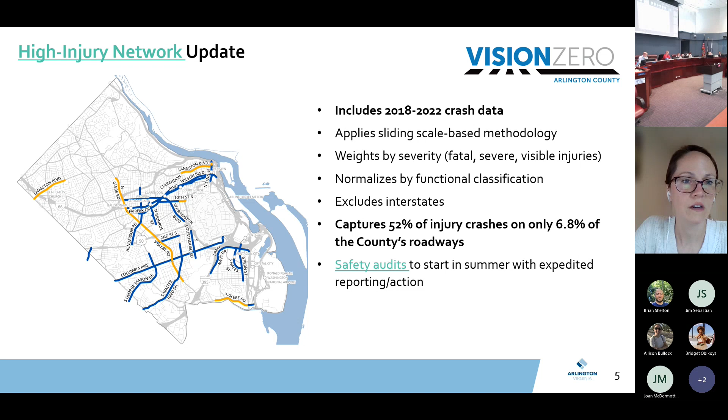And so with that, as I think we've talked about this before, our program is maturing a lot. And so we're kind of understanding a little bit more about what our program looks like and being able to communicate that. And I found this slide to be really helpful, that we have a lot of responsive work that we are doing to crashes, like critical crash follow-up.

Every time there's a fatal or severe crash, we follow up as an interdepartmental team to see what we can do from an engineering or education standpoint to address those.

We have our hotspot and high injury network programs, and we address safety concerns through the community report a problem tool. But then we have this proactive side, and this is where we're really starting to ramp up, and that's systemic improvements - finding one safety issue in one location and then trying to identify and improve other similar locations.

We do community education, which is proactive, and then there's the equity component. And that's performing an analysis of transportation safety issues countywide to identify and address areas or people who are disproportionately affected by crashes. And that's what I'm here to talk to you all about tonight, is this equity analysis that we have worked on over the past a little more than a year as an interdepartmental team.

So one of the 6 goals of the Vision Zero program is to prioritize transportation safety investment equitably in our communities.

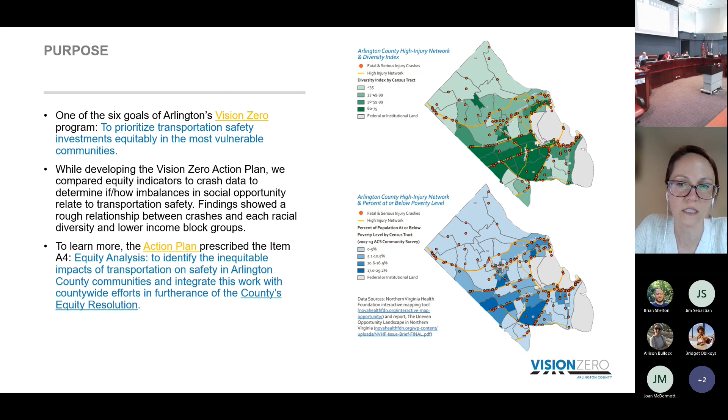That was item A4, to identify the inequitable impacts of transportation on safety in Arlington County communities and integrate that work with the countywide efforts to further our county's equity resolution and the Realizing Arlington's Commitment to Race strategic framework. So that was what really launched this effort.

So we convened an interdisciplinary internal project steering team, which helped us to really refine that scope of work, because it first started out as a mapping exercise. And then as we started to learn more, we wanted to get more people involved, so we brought in this really great team with people from a bunch of different departments. We realized this was our first investigation into transportation safety with that equity lens.

As we got deeper into it, we kind of refined the scope, and then, after doing a lot of analysis, brought a consultant team on board. We worked with Toole Design and Fehr and Peers to help quality check a lot of our work, as well as help us package it up and bring it to the community in a really nice public-facing document, which hopefully you've had a chance to look at. I think it really does a great job of communicating what we've done.

As a starting point, we defined equity emphasis areas, to focus on potentially underserved neighborhoods. Defining equity emphasis areas let us explore the disproportionate impacts of crashes on neighborhoods with lower incomes or higher Black, Indigenous, and people of color populations, because we know people within these demographics have experienced inequitable outcomes in other social realms before.

So to maintain consistency with other county equity initiatives, the equity emphasis areas we worked with were identified as part of Arlington Transit's Title VI requirements and guidelines for Federal Transit Administration funding recipients. So we used those Title VI block groups, and they're based on two separate criteria.

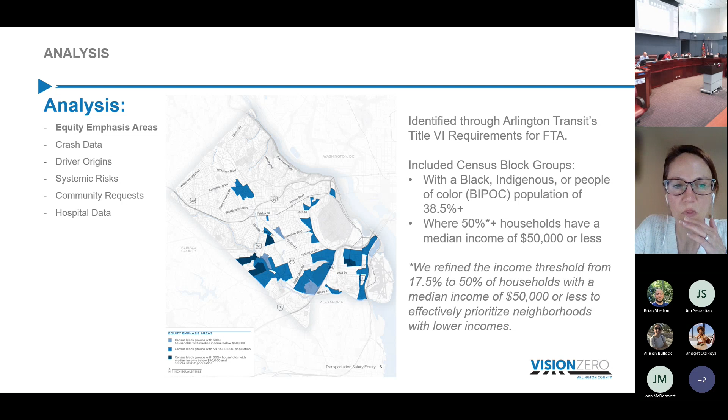So then looking at the equity emphasis areas, we looked at crashes from 2017 to 2021, and we did find that equity emphasis areas experienced almost twice as many crashes per square mile than the county as a whole. So that helped to really confirm that there was an inequity there.

We also assessed the origin of drivers, so we looked at the zip codes from the drivers on the crash reports. I know a zip code isn't always a great level of geography to conduct an analysis like this, but that information was readily available in the police crash report dataset, which allowed us to do this analysis. So that's why we worked with the zip code.

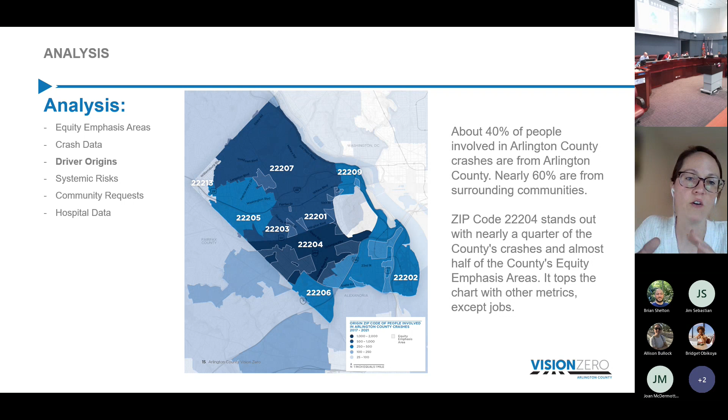But the intent was to identify origin patterns and determine how local and regional trips impact crashes. Knowing where people involved in crashes are coming from really helps us to better direct resources to prevent crashes. What really stood out to us in this analysis was that people from 22204 were disproportionately involved in crashes, and we did see a lot of overlap with the equity emphasis areas and the 22204 zip code.

We also analyzed the intersection of crash factors with socioeconomic, roadway, and other built environment variables to identify crash trends and at-risk locations, both countywide and specifically in equity emphasis areas. This was called our systemic analysis, where we try to see what issues are common and identify those risk factors and address them before crashes happen.

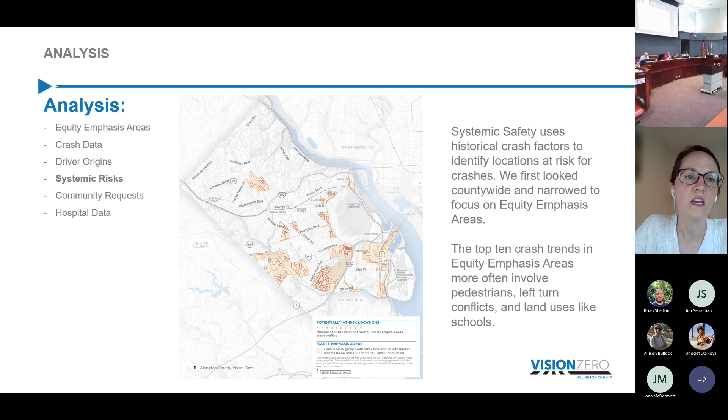Understanding the existence or absence of certain factors influencing crashes helps us make proactive safety improvements. The top 10 crash trends in equity emphasis areas that we found more often involved pedestrians, left turn conflicts, and land uses like schools or neighborhoods. So that was another way where we learned more about what types of issues we were seeing in certain areas of the county.

We also examined community requests. That was community reported safety concerns that came in through the request for service portal, inquiries to the county board, through the ART or WMATA service portals, or applications to the Arlington neighborhood program related to transportation safety, or applications to our neighborhood complete streets program.

We use this community request data when we make decisions about roadway changes, as well as when we time and prioritize changes. So it's really important that requests coming in accurately reflect the demographic makeup of the county and reflect neighborhoods within the county. Community requests we saw were really underrepresented in equity emphasis areas as well.

The last thing we looked at was transportation-related injury records by demographic characteristics to look at imbalances in hospitalizations. We looked at that in comparison to countywide census data.

We used Virginia Hospital Center data because that was the only hospital that let us get some of their data, which was really great. It's formed a really nice partnership with Virginia Hospital Center, but we do recognize that we have a limited sample size when we were looking at this information.

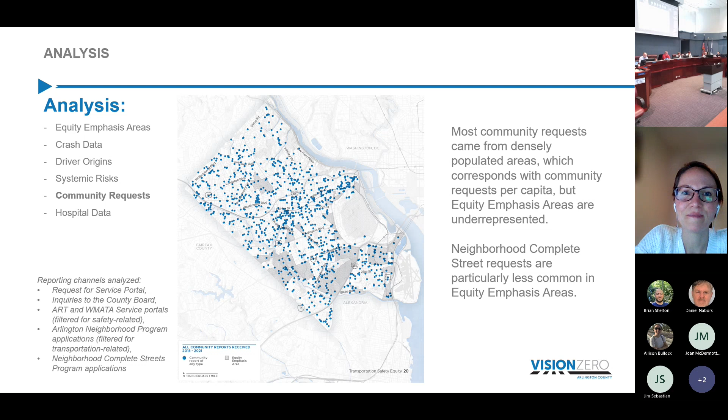All righty, next on the agenda I'll be presenting on the Arlington Boulevard Trail Study. For reinforcement I have my supervisor, Allison Bullock, the Transportation Planning Supervisor, and also joining virtually tonight is Jim Sebastian, who is with Toole Design. They've been working with us on the study. Just bear with me, I was really engaged in the last presentation, so now I'm trying to bring up my own slides, just hang on. I had this all figured out. Okay, there we are.

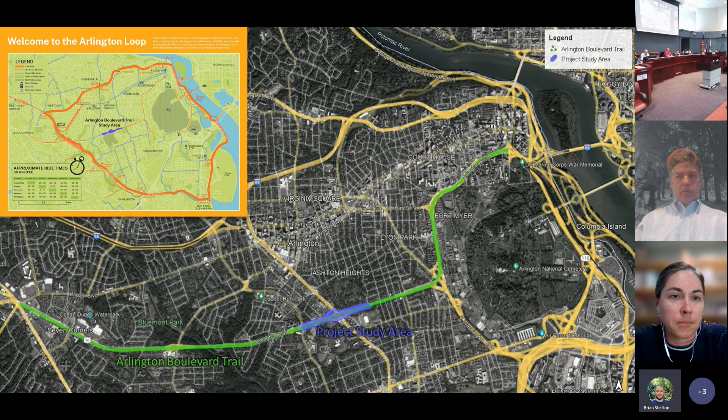So you can see our study area on the screen in blue in the big map, and in the top left you can see the red circle or loop, and the blue line in the middle of that, which is what we'll be focusing on tonight.

So how do we get here? There were several adopted plans that recommended trail improvements along the Arlington Boulevard corridor. In the fiscal years 2022 through 24 CIP plan, $200,000 were allocated for an engineering study to look at the trail and see how we can make improvements, if they were at all feasible.

So like I said, we started in 2022 and we are wrapping up hopefully within the next few weeks.

So the goals and objectives of the study are to develop some design concepts for improving sections of the trail at points that are narrow, and it could be wider. We want to remove some physical barriers, and some perceived barriers to use on the trail, and other obstructions. We wanted to identify some preferred routing.

On the trail and the associated improvements for intersections and crossings, not limited to ADA accessibility, meeting the expectations of the MTP in terms of trail widths, and providing direct paths and connections wherever they are possible.

And that plan and guidance came out of the master transportation plan, goals and policies, the bike element, pedestrian element, public spaces master plan, trails within the master plan, public spaces master plan, and as Christine just talked about, the Vision Zero action plan.

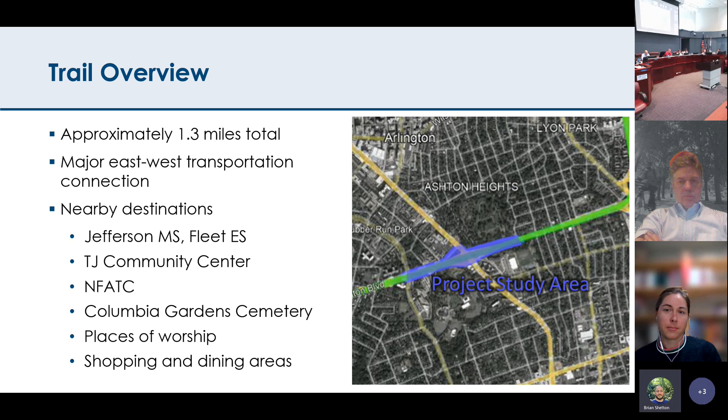So now I want to talk about public engagement and what we've done thus far. So we started the process with a walking tour in June.

There was a preliminary walking tour with a handful of us from the community and a few staff members, people who had been advocating for improvements along the trail for quite some time, including the Washington Area Bicyclist Association, Chairman Slatt, board member, two former staff members who are also Arlington residents and avid cyclists who wanted to make sure they contributed to this effort as well.

And after that walking tour, we had a formal walking tour, and some of the same people came back out, and we walked that 1.3 mile area and made sure to ride on bikes. Some of us walked, and made sure we could identify areas that seemed to be impediments to using the trail.

And after that, we started with our online engagement by just asking the community what they thought the issues were with the trail, or things that needed to be improved, things that they liked, so that we can then expand upon that and see how we can make it better.

And from that, we had a series of design concepts come out of that effort, and two designs did come up with some really good ideas. We then floated those back to the community with the community engagement effort.

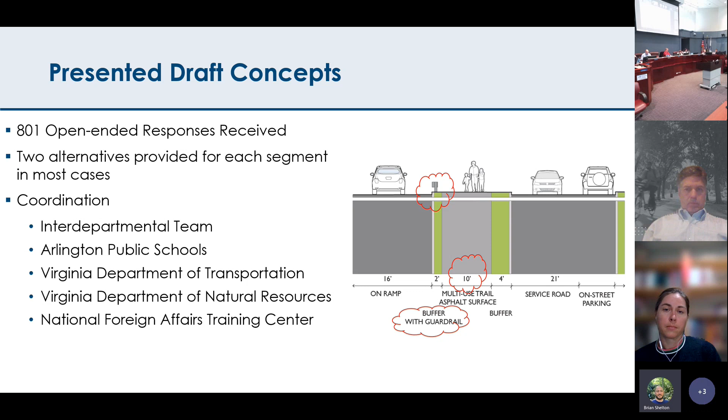So what people liked after those changes, from the initial feedback, was the sufficient trail width - they liked the trail width, it seemed to be sufficient. There were minimal tree impacts, there was vehicle separation, and the trail seemed safer.

Most respondents said there were priorities outside of the study area. This was an open-ended comment response form, and for each segment people were free to say whatever they wanted. Some people said we'd rather see something on Pershing Drive, or we'd rather see something in another location - it wasn't really a priority. So those comments were there. But within the study area, some people said they didn't want to see anything change, that it looked just like they wanted it to. So that let us know that we at least did something right.

Some people wanted to see the vehicle separation changed - they didn't like the alternative. There were several alternatives: one was preferred and another was a second alternative. Some people didn't like the other alternative, they liked the preferred, so that was also positive. And then minimal tree impact - some people wanted to see more trees or more shading and things like that.

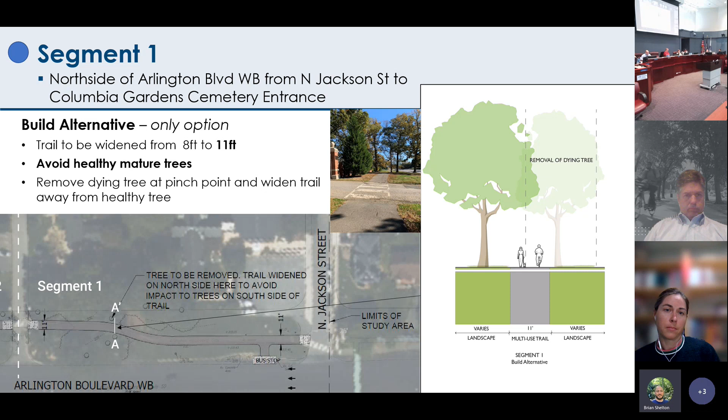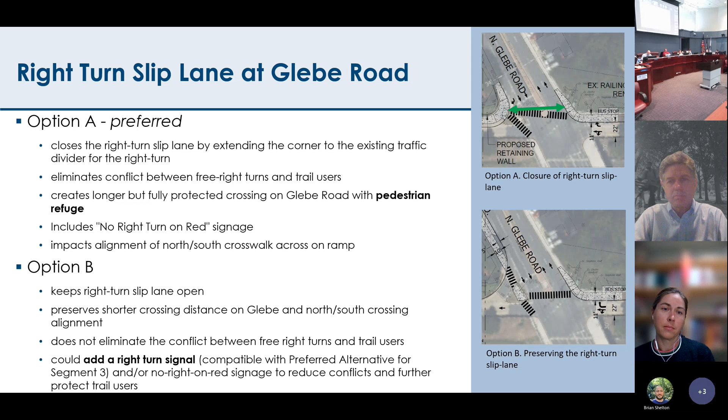The big change here is once you're traveling past that intersection where the slip lane is, we are recommending taking width from the on-ramp, Glebe Road westbound, and creating a new facility along that off-ramp for cyclists, so there's a continuous stretch a person would travel without having to, as happens currently, make the right westbound on Glebe Road and then a left on Cathedral Lane to continue westbound back to Arlington Boulevard. This alternative keeps you on Arlington Boulevard the entire time.

With this alternative, you continue along the 11-foot trail. The other change with this recommendation is the closure of what I consider a redundancy in the system, where we have two off-ramps approaching the George Mason Drive intersection. So the trail would continue along, cross over the existing ramp, and continue up to George Mason.

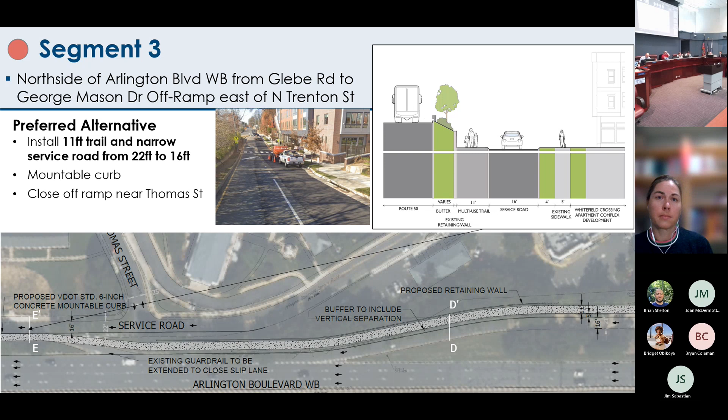The second alternative, which is what we do currently, is we make the right from Arlington Boulevard at the Glebe Road off-ramp onto Glebe Road, then turn left onto Cathedral Lane. If we're not able to make that new trail happen adjacent to the off-ramp and on-ramp, westbound Glebe Road to George Mason, we would want to improve the existing facility on Cathedral Lane.

We'd convert it from two-way to one-way right past the fast food driveways. There would still be access to both the McDonald's and the Dunkin' Donuts from both directions, but once you get past the driveway for the McDonald's adjacent to the Cat Veterinarian, it would only be one way. We would narrow the road, widen the existing sidewalk, and provide a 10-foot trail and a 5-foot buffer on Glebe Road, and an 11-foot trail and 4-foot buffer on Cathedral Lane.

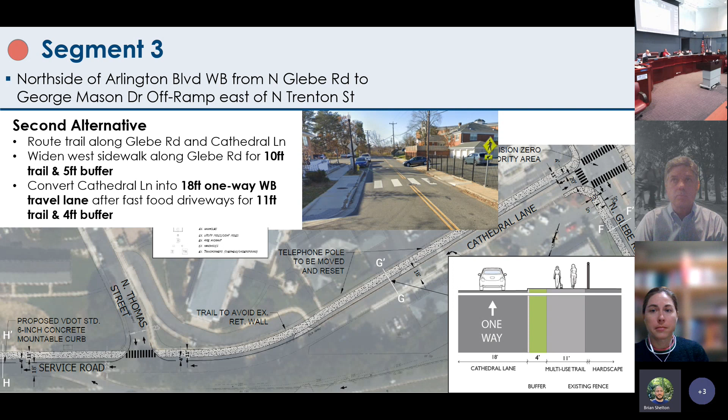So that's what would happen at this location. Just to be clear, on Glebe Road we would continue with a 10-foot trail and a 5-foot buffer instead of 11, because we do not physically have the space to provide it. This was one of only two locations where we could not get to 11 feet. So at this location on Glebe, it's still 10 feet. It's wider than it is today, but it would be 10 feet at this location.

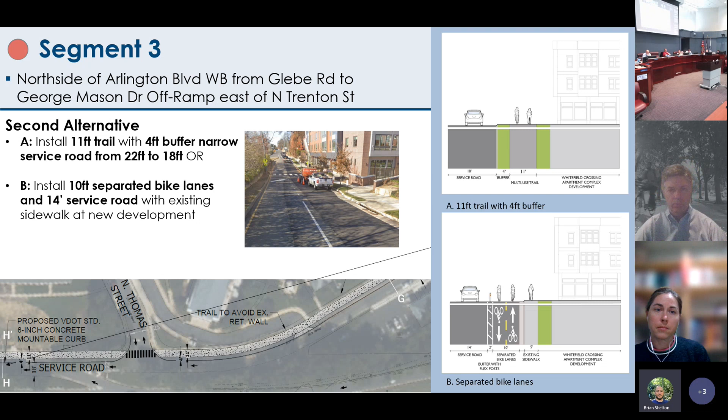As we continue on Cathedral Lane in the one-way direction, which is there today, we have two choices. We could either have an 11-foot trail with a 4-foot buffer, or separated bike lanes and a 14-foot service road. So those are the two options with that second alternative.

Segment 4 is from North Trenton Street to George Mason Drive, still traveling westbound. Here, the preferred alternative is to widen the sidewalk from 5 feet today to 11 feet with a 2-foot buffer, maintaining the existing lanes. This recommendation, however, relies on the redevelopment of a church adjacent to the sidewalk today, and there is a for sale sign out there. So we do know this could potentially be a reality one day, but that is our preferred recommendation.

The second alternative would be to widen the sidewalk to 11 feet with a 4-foot buffer, and remove a lane, leaving just a left turn lane and a straight-through right turn lane at the intersection. The consequence of doing that, though, is that the queuing could back up very close to Arlington Boulevard, which may be an issue.

I should also mention, although it wasn't part of our study, we're fortunate that the George Mason Drive study is happening at the same time, right at the end of our project study area. That study recommends some modifications to the bridge at this intersection, so cyclists would cross over here to travel back east in our project loop.

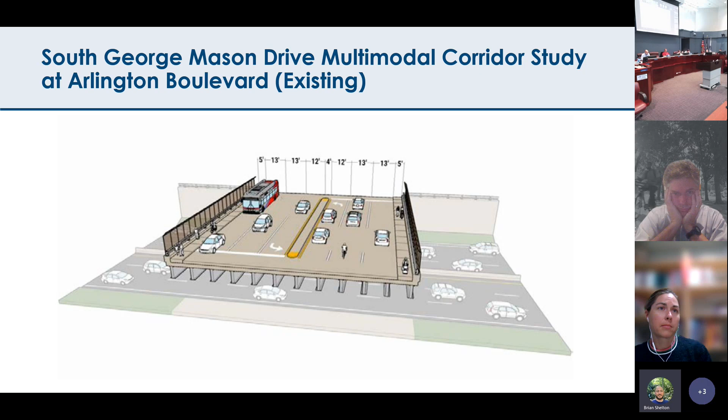Today at that point you'd see 13-foot travel lanes, a 4-foot median, a 12-foot turn lane, and a very narrow 5-foot sidewalk. The recommendation in the South George Mason Drive multimodal corridor study is to narrow those lanes to 10 feet, with one 11-foot lane for bus activity, a 4-foot median, 5-foot bike trails on each side, and a continued 5-foot sidewalk. This narrows the cartway significantly but increases the area for bike and pedestrian activity.

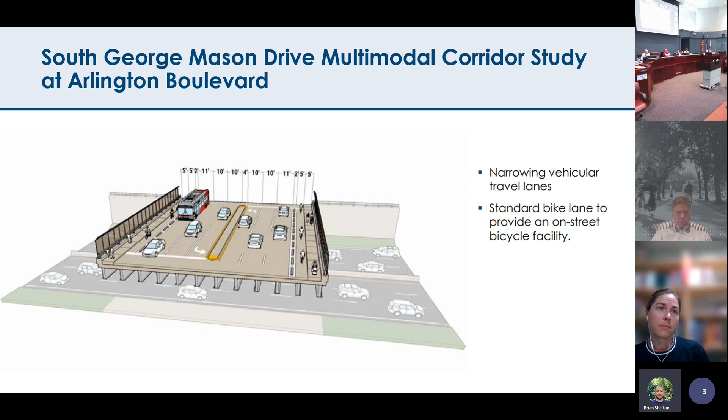So as we travel back east, in segment 5, this is the location south of Arlington Boulevard on the service road, adjacent to the National Guard Readiness Center. Here we recommend continuing the trend of an 11-foot trail with a 4-foot buffer, where an 8-foot trail exists today with a 5-foot buffer.

So the preferred recommendation is 11 feet, with an 8-foot pinch point in front of these three houses, then widening back out to an 11-foot trail with a 4-foot buffer as we cross the National Foreign Affairs Training Center, and installing a median at the entrance to the NFATC site. Right now it's an enormous amount of cement that could benefit from some kind of pedestrian refuge, mountable so large vehicles can still get through without hindrance. We thought that was a great way to appease that concern while still providing refuge.

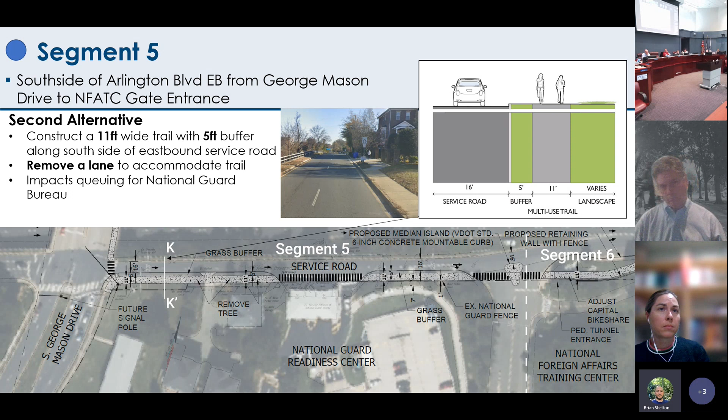The second alternative would be to remove a lane for the eastbound on-ramp back to Arlington Boulevard. This could be troublesome because it would impact queuing at the National Guard Bureau. But if they decide to relocate that guard gate in the future, this might actually be the preferred alternative, since today cars queue in one of those two lanes waiting to turn into the gate, which is right at the service road. If that lane is taken away, there'd be only one lane of queuing. So for now, our preferred alternative is to keep the two lanes and have a wider trail this way.

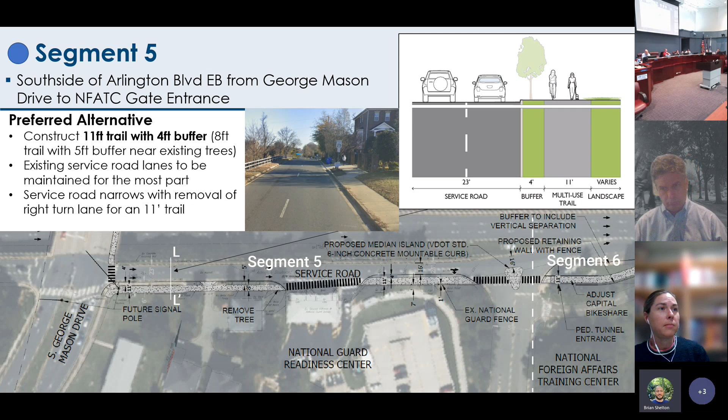In segment 6, you may see a familiar figure in the picture here. I don't know if you can tell who that is. Chairman Slatt.

So the preferred alternative is to widen the trail here to 11 feet. As you can see, it looks a bit problematic because it's a narrow, patchy sidewalk immediately adjacent to an off-ramp on Arlington Boulevard. We're approaching the Goodwill site, which we just recently heard may be redeveloping, so we thought this was another great opportunity to take advantage of that. The recommendation is to widen the trail to 11 feet.

You may not be able to see it here, but there's a fence currently along the NFATC site, so we're pushing into that space a little to get the 11 feet. We're working with NFATC on this concept, and they've been amenable so far since they see the benefits of an improved trail too. We're happy they're our partners and are at least considering the possibility of a widened trail at this location as well.

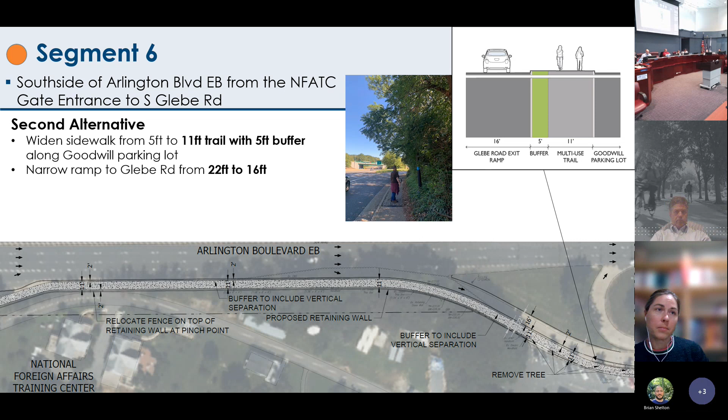As we approach the final segment, segment 7, we have one alternative at this location. There are 2 parts to segment 7. In this location, the alternative is to widen it to 11 feet.

There's also a bus stop here that exists today, where my cursor is in the image. Today, if the 4A were in existence, a pedestrian would need to cross over the ramp to get to that bus stop. What we're recommending is a trail, a sidewalk that trails along the on-ramp, taking you down to the bus stop so you can cross where you have protection and walk down to the bus stop. We have the same theme with the 11-foot trail here with a 3-foot buffer adjacent to the service road, and there is narrowing that would occur at this on-ramp to get that 11-foot section on the trail.

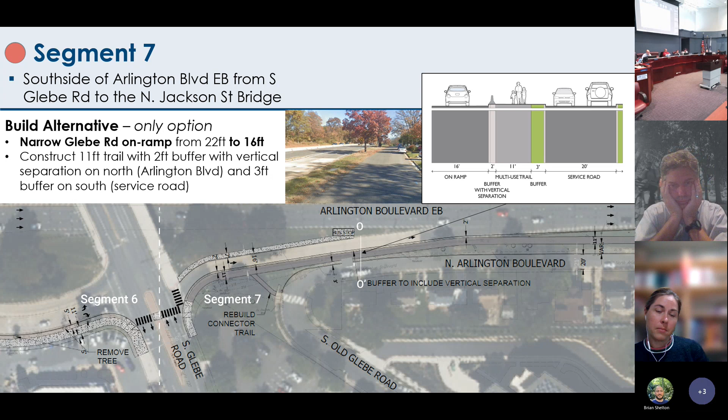In this location, we've had the good fortune in a few locations to have other projects happening within this short 1.3 mile area.

In the VDOT STARS report, which is now a smart scale project, there is a recommendation to close. There are 5 existing driveways along Arlington Boulevard and the cars back onto Arlington Boulevard here. VDOT's recommendation is to close those driveways, provide a trail there, and a separate facility for access to those homes.

We do see that as the preferred alternative because it provides much better protection for cyclists and pedestrians at this point, as you are approaching the Thomas Jefferson Community Center and a park that's here. This is the preferred recommendation.

The alternative would be, if for some reason this smart scale project does not go forward and we're not able to do that, to continue the trend of widening the trail, maintain the existing driveways, and at the same time avoid a mature tree that is here that the urban foresters within Parks and Recreation really wanted us to try to protect. So we are meandering the trail to go back up to the bridge at this point.

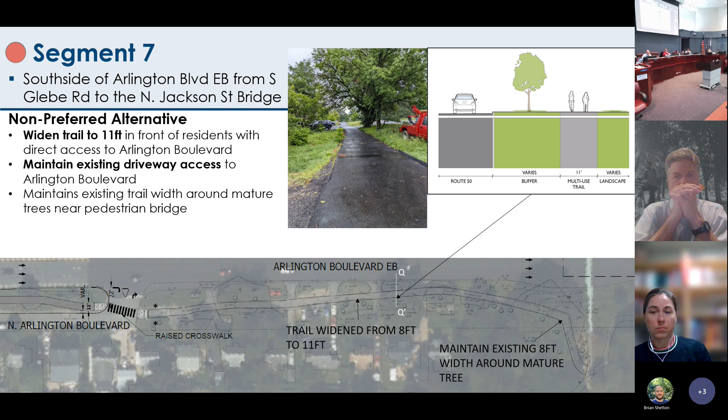And those are the 7 segments. The next steps for us are to publish the study report. We have those few remaining tasks to complete. This summer, I will be working on a document framework scope and initiating an operational and safety analysis report with VDOT. I understand it's a lengthy process, which I will be undertaking. And then from there, we will have a package ready to request funding for the Arlington Boulevard Trail design and construction.

And with that, that's the end of the presentation. I am happy to take questions.

Awesome, thank you so much, Ms. Obakoya. I'm just really happy and ecstatic to see this study get to this point with such a high quality design.

We set you a big challenge when we asked the county to study this particular part of the Arlington Boulevard Trail. I believe, as we said when we were talking about this, this is the hardest part, so we should start with this first because it's going to take the longest. And it's a very constrained area. You know, the trail, or the tiniest bit of sidewalk that we call a trail, is always crammed up between a hillside and a big road, or a retaining wall and a big road. There's always a big road though. So this is, I think, more than a lot of us feared to hope for. And I think it's really great.

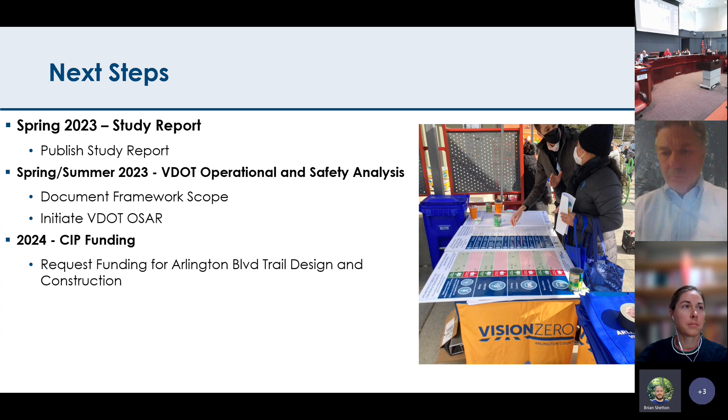I think I have two main comments. One is, you know, we have a couple segments here where we are basically relying on redevelopment, and I think it's understandable in both of those spots that we're doing so. I would love to see that alternative that relies on redevelopment show a better trail. I don't think what we have in those instances—an 11-foot with a 5-foot buffer or whatever—is what we would design in a green field, right? That's not anything anybody would look at and say that's the ultimate trail.

That's the perfect trail, that's what we really want. It is a reflection that this is a constrained area. I think when we have redevelopment, some of those constraints go away a little bit, right? The building's not going to be there, and this and that's not going to be there. I think it would be really helpful when we go to review the redevelopment that might be required for that to happen, if we have in this report a design that is more of what we would actually want.

You know, I think you ask your average trail user, would they like 4 feet of buffer next to a busy road, or would they like 6 feet of buffer next to a busy road? And they would want more, they would want trees on both sides. I think it just helps with that conversation about community benefit during redevelopment if we're starting with what we really want, and we can negotiate down to maybe something that's not quite that good, rather than having what's in this report be something that already is kind of compromised. So I think that would be my main piece of feedback. But I think this is fantastic.

And with that, I will jump over to other commissioners. Commissioner Lynn, tell me. Yeah, I actually have a question.

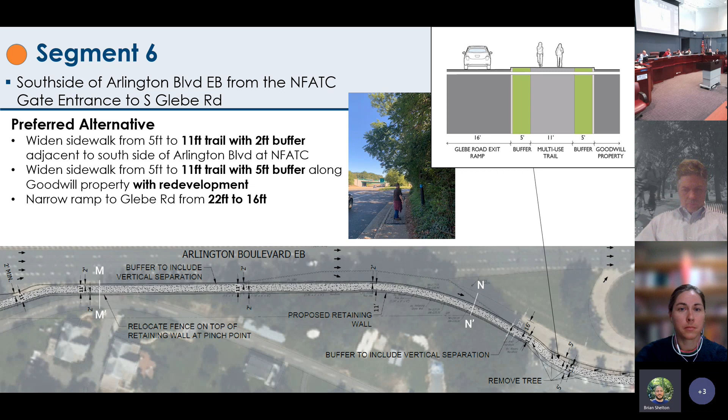A couple of the pinch points, because there's a tree, we're going to narrow it down from the preferred 11 feet to less than that, which is fine, I understand that, it makes sense. But at some point the tree dies. When that happens, could we have a placeholder there so the trail could then get widened, and the replacement tree be put just off the trail, so that we can have a consistently wide trail? It may mean years from now, and I just don't want it to be forgotten, because trees do die, they're living things, they don't last forever. We could then eventually get a full width trail all along.

It is our preference that we don't build for that 8-foot condition today and provide an 11-foot wide trail. And whether or not the tree dies, we still have at least what we hope for.

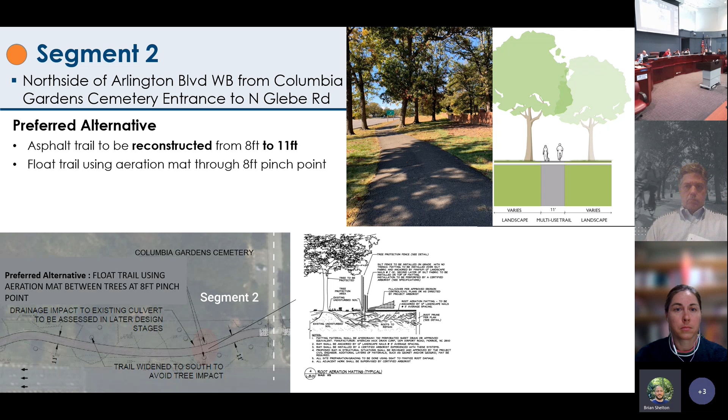In this slide, I believe this is the one you're talking about, where we're showing as an alternative - I don't think it's showing on the screen. Here, to maintain this pinch point, this is the location you're talking about. Our preference is to install, at this point while the tree is still healthy, an aeration mat and just float over that with an 11-foot trail.

So it would be 11 feet at this point. Okay, well that's great. But I think there were a couple other spots where we would do a jog or something to accommodate. Was it narrower or just a kink? No, we were able to keep the 11-foot at that point, where we were to jog around another tree - a heritage tree adjacent to Thomas Jefferson.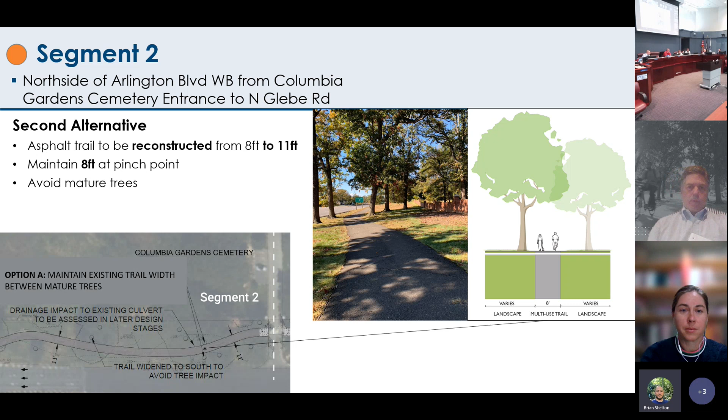Yeah, I think that whole bit of closing the redundant off-ramp and all of that would be an improvement to that neighborhood across the board. Even without additional new trail, that makes it for a very car-centric and weird little bit down there. And I'm very supportive of closing the slip lane from Glebe Road down to westbound Washington Boulevard, Arlington Boulevard.

But I'm sure that's a continued conversation with VDOT. Concur on all of those. That said, I will take this opportunity to bring up to the Transportation Commission that VDOT is updating their bicycle and pedestrian plan over the next, who knows how long their process is going to take. But keep your eyes out for opportunities to tell VDOT that this is an important part of their bicycle and pedestrian plan, or at least should be.

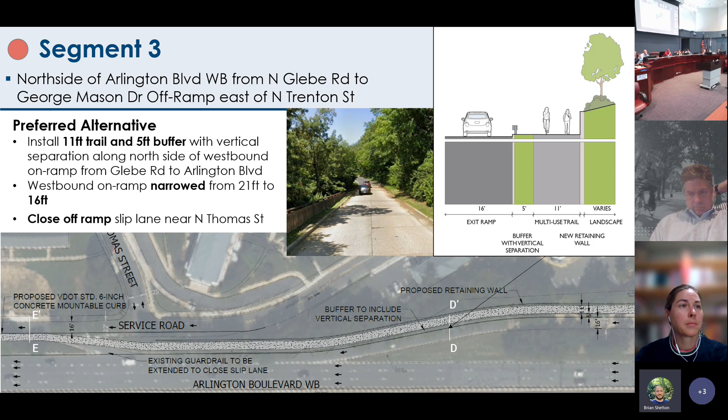Commissioner Theo, go ahead. Just a question for clarification, I guess. I noticed with the bus route westbound, the plan is to have the bus stop moved from directly on Arlington Boulevard to the ramp, and then for the bus to cross over and get back on Arlington Boulevard. But that doesn't seem to be the case with the eastbound, correct? That is correct, eastbound is still okay.

But in both instances, there would actually be a sidewalk to get you to the bus stop, unlike the current condition, which requires off-roading.

Is there anybody who can talk more about the aeration mat? This is a new concept to me that I've never heard of. I wish I could, I just learned about it myself. We actually found this idea - one of our urban foresters mentioned it, and we went to a company that was doing it, and we thought it was a great idea. So we were scrambling for a section to show you all, and she said, oh, I found one in our standards. So it's something we do have in our standards that apparently somehow got in there. I would love to tell you more about it. Apparently it's designed in a way that allows trees to breathe and grow without any real impediments. I don't know if maybe Allison or Jim can speak more to that, but it was something new. That question was mostly to try and give Jim an excuse to speak, but Jim, you missed your opportunity. So, but we thought it was a great idea.

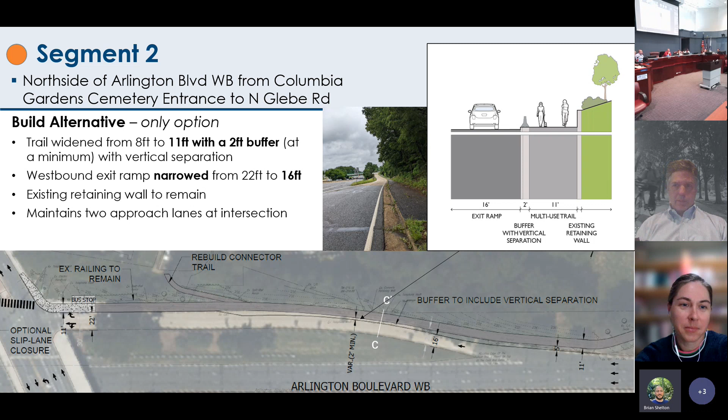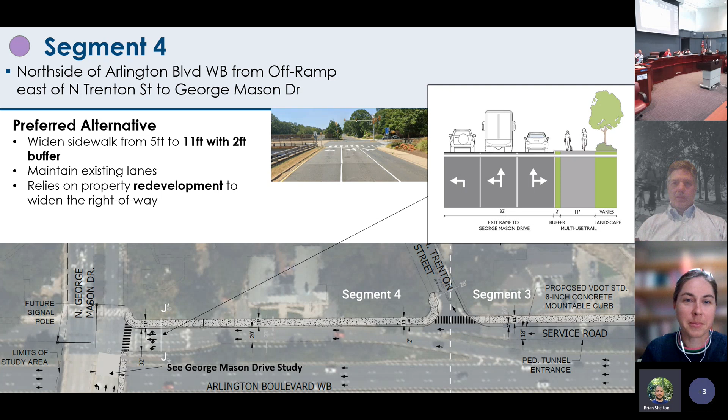All right, I think my last question is on segment 4. Is there anything, absent redevelopment, is there an alternative too for segment 4 that removes one of the lanes? I think I missed it my first time through. So this is segment 4 - the preferred is to keep the 3 lanes. The alternative is to remove a lane to get the additional width, understanding there would be some consequences to traffic queuing potentially if we do that. All right, yep, I missed that second alternative my first time through the deck, so I think I'm good.

Any other commissioner questions or comments? All right, I think that's it then. All right, thank you guys. So good.

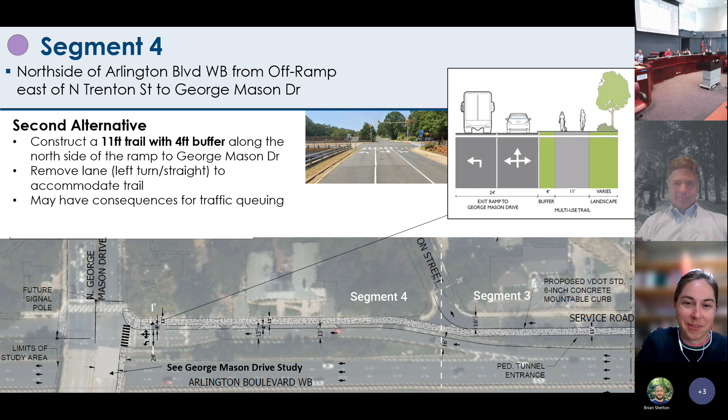And with that, that was the last item on the agenda. Do we have any other business we need to discuss?